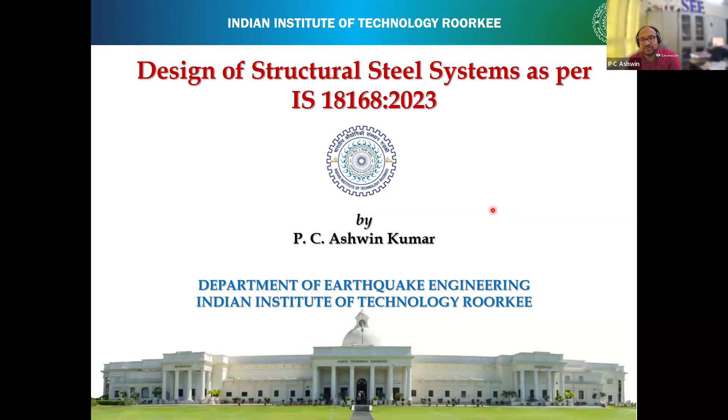Since it's a 1 hour lecture, I want to introduce the audience to the IS 18168 code, what it really does and how it goes about. I'll keep my pace such that you understand the basic concepts, so that when you open the code, you'll be able to understand what the clauses mean. I will not go clause by clause.

You know that IS 800 2007 is already there for design of steel structures, wherein we use the limit state method. In that, structural systems like MRF, CBF, and EBF are explained, more or less like tension member, compression member, and design of forces like column, design of beams, etc. But the structural system per se is given in section 12.

Section 12, if you open and see, if you have to design these systems, it's only about a 1.5 page detailed explanation—very limited. But recently IS 18168 in 2023 has come about, wherein these systems have been explained in detail.

Specifically, when you look at steel buildings, we rationalize it as good performing in high seismic regions. So accordingly, IS 18168 is specific for earthquake resistant design and detailing of steel buildings—it is a steel building code of practice.

So you have nomenclatures like MRF, SMRF, CBF, SCBF—which is nothing but moment resisting frame, and special moment resisting frame. Same kind of nomenclature as in RCC, where special moment resisting frame is because of the detailing practice, whereas nothing else changes in terms of the overall behavior of the structural member in seismic response. It is the detailing or connection practices that we have to follow, which makes them special.

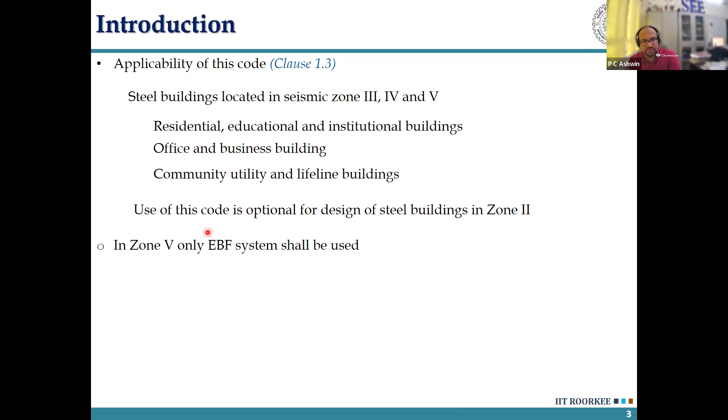Now, few things: in zone 5, only the EBF system, eccentrically braced frame system, shall be used. I want you to understand that there is something good about the EBF system, that is why it is being specified for zone 5.

The next point is, in zone 5, SCBF, special concentrically braced frame, shall not be used. So there is something wrong about the performance of special concentrically braced frame, that even after being special, it is not being permitted to be used in zone 5. So we'll see what those problems are.

And then in zone 5 and 4, SMRF buildings of less than 15 meters are allowed. You understand why that is, because of the stiffness issue - a moment resisting frame as such has less amount of stiffness. So above 15 meters, the stiffness becomes more of a problem. So it is like, okay, you go for less than 15 meters, in zone 5 and zone 4, you can use it.

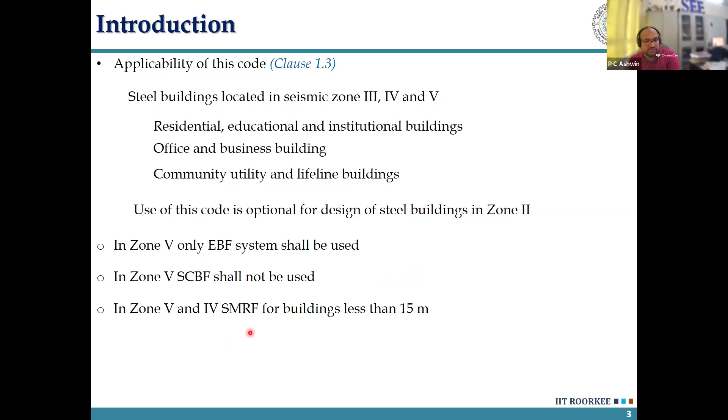That is what is given in IS 18168. It will be a little bit different from what is currently established in 1893 part 1 and part 5 of 2025. So we'll keep it to 18168 right now. And all steel frames in a building need not be designed for earthquake load - so this is a little bit new.

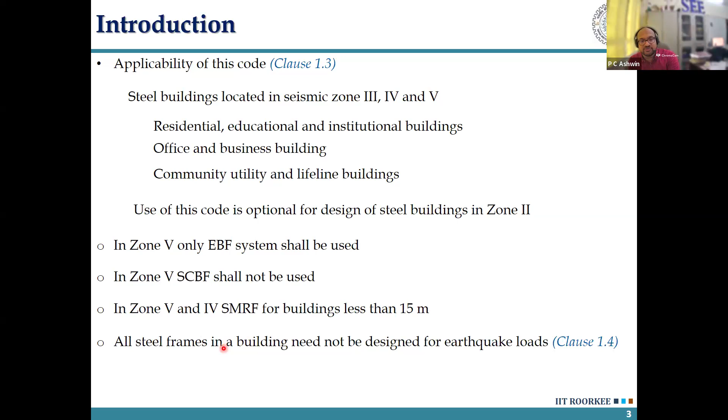We'll come back to it later on. It says not every frame or every element needs to be seismic force resistant. You can design a few to be seismic force resistant, and the rest can be gravity load resisting members. So we'll come to it later in that essence.

Now, at the concept level, you have to understand that this 18168 is not against or a new method with respect to design of steel structures. You were using IS 800 2007 limit state method, and now also you will use IS 800 2007 for designing the members.

This code, in terms of the capacity design concept, brings about how to assess the forces in the members. So the important aspect is how to assess the bending moment, shear force, or axial force in a member. And once you've assessed it correctly based on the capacity design approach, you go into designing of those members based on IS 800 2007 limit state method.

That's it. And you already know capacity design - all your teachers, once they talk about this capacity design, would have always shown this chain-like kind of structure, where they say that in capacity design, we design the weakest link to be the most ductile, and the rest of the members, these big ones, are designed for higher strengths, so that you don't depend upon ductility of the system.

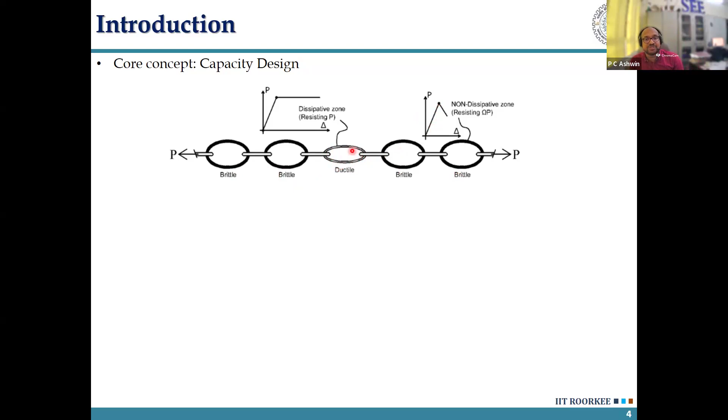That is why we call them brittle - it has high strength, high elasticity, etc., and the elastic strength, meaning yield strength, will be much higher than what this ductile member will be having. So the weakest member, designed for the adequate required force, is to be the most ductile, so that when I pull it, all the damage and energy dissipation happens in the weakest link. That is the capacity design approach.

Now, this would be the most important slide that you have to remember throughout this particular course that I'm going to take in this lecture. So now there is a force controlled element, and there is a deformation controlled element. The thing I'm saying is, suddenly I said deformation control and force control element.

The deformation control element is a designated element, in which we are not bothered about how much force is going to come, but we are bothered about how much amount of deformation it can take - which means I'm more dependent upon the ductility of that particular system, which means it is the energy dissipating element, that element is going to yield. It has to be ductile so that it is able to deform much more without failure. So the deformation controlled element is the most important element, symbolized by this ductile element in this capacity design method.

And the force controlled element is the one where we want the forces to be within the limits, such that it does not exceed this tipping point shown in this particular graph.

Please understand, deformation controlled elements are the ones we depend upon to dissipate energy through yielding or nonlinear activity during an earthquake, where deformation or ductility is more important. The brittle elements in the capacity chain, the stronger elements, are the ones where we depend more upon forces, meaning the maximum force that comes into them should stay below a certain limit.

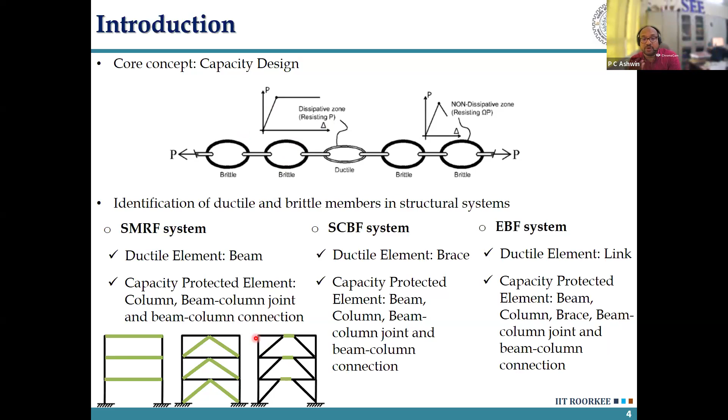So if this is clear, we will move forward. To summarize: deformation control elements are the heroes of the story, while force control elements are the more important ones for structural stability. We want those elements to survive so there isn't much damage.

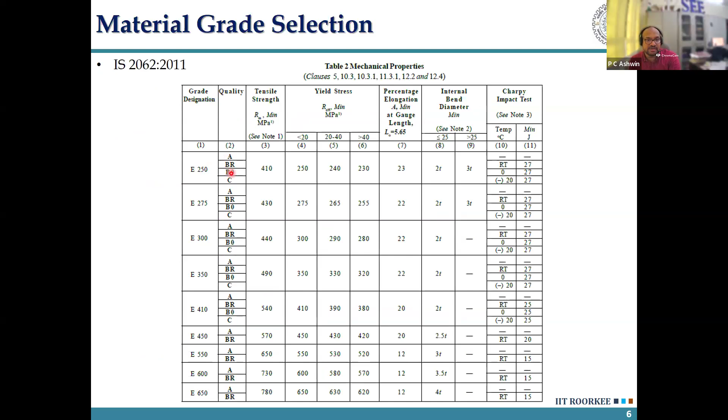As mentioned, there is a subcategory of steel grade, like E250 having grades B0 or C, meaning there are four subcategories: A, BR, B0, and C. Category A is for simple structures, like if you're building a temporary shed or non-important structures, you can go for category A steel, which is of low cost.

Normally in India we go for category B0 or BR. B0 is used when building a structure that is not temporary, where there is a possibility that the temperature may be nearer to sub-zero, like in Delhi, maybe around 3 degrees Celsius or so. For colder climates, you go for B0, where there is a minimum requirement of the Charpy test to be done at 0 degrees Celsius.

BR is where the impact test is done at room temperature, with respect to the ductile to brittle transition. A steel metal, when it gets colder, becomes more brittle. So if you are in an environment where the temperature is going to go down, you have to be very careful in terms of the selection of this subcategory of steel.

So if you are going into the Himalayas, and you want to build a steel structure, category C would be the most ideal, as it assures you a certain level of Charpy value at minus 20 degrees Celsius. It is mandatorily telling you to do the Charpy test. That is how you will be able to ensure it.

As you see, as the category goes down, the cost also increases because you're asking for more performance from the steel - give me higher energy at minus 20 degrees Celsius. That's the energy due to the impact test that you do under Charpy.

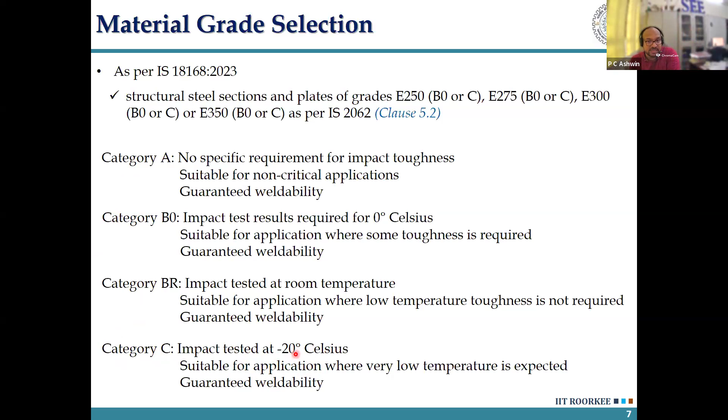Then you have the mill test report - I have kept the SAIL report here. A mill test report is something engineers, students, and everyone has to be very careful about. It gives detail about, when you buy steel from a vendor, what is the property of steel that you get. This is a mill test report from a particular lot.

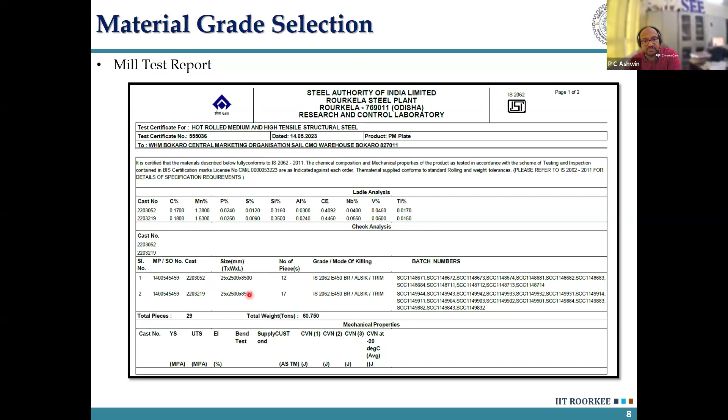They have given the chemical composition, the size of the plate, the thickness of the plate, and what is the yield strength that they have got from it. So this is the tested value, not the nominal value.

So if you're buying a grade of E450, they will test it. They will say in this lot, when I did the coupon test, I'm getting the value of the tensile yield strength to be this much. So this is the tested value.

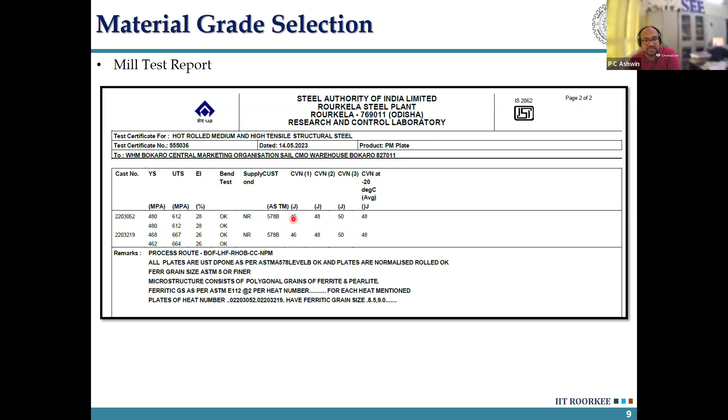If you buy from a local vendor, you might not know these values, and you might be under-designing, or the material may be underutilized or overutilized based on what the actual grade would be. But a mill test report gives a certificate as to what you're buying.

Now, if you look at IS 18168, one more thing it says is E350 grade is the maximum that you require, but you need certain properties - as I said, minimum percentage elongation is 22%. Now, 22% is a direct measurement of the ductility of the steel. You test...

...the steel under a monotonic test under a UTM machine, and you measure the percentage elongation over the gauge length. So minimum that would be 22%. Then it says the structural steel should have a minimum Charpy value of 27 joules at 0 degrees Celsius. And the ratio of ultimate to yield strength shall be 1.15. This is there in rebar also - the minimum 1.15 ratio is also mentioned there.

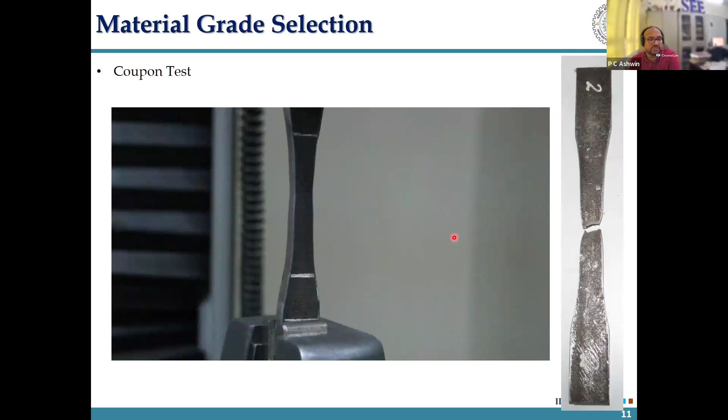So we'll get to know what these things are. So, coupon test - just for the audience, students who have not witnessed it - there is a coupon test. This is the gauge length. You have a grip in which it is being pulled, and it breaks in the gauge length area, meaning you have a valid coupon specimen over which you measure the percentage elongation, yield strength, and ultimate strength.

Now, FU by FY - understand this, I'll slow down. In terms of percentage elongation, that is a direct measurement of ductility. The relevance of the Charpy value - if you're already saying that 22% elongation is what measures ductility, why is there a need to do the Charpy test?

The Charpy test is important because when you do welding, or some kind of joining exercise, or even when the metal is formed during the manufacturing process, there is a possibility that there may be some initial voids or porosity, or while joining, some notches may be created.

So let's say there is an initial crack already present in the steel. Now, the Charpy test is like a fracture toughness measurement. It says if you have a crack, the opening or propagation of the crack becomes very fast if your Charpy value is less than a certain number. If it is more, even if you have a crack—see, if you weld any steel, the process is not completely flawless. It will have some flaws: porosity, slag inclusions, anything and everything can come in. So there is no point looking at a fracture initiation time; there is already some kind of crack there, and you want some kind of life in it. So when you look at bridges or buildings, Charpy keeps coming up again and again, which is a kind of fracture toughness in the material. So 27 joules at room temperature or 0 degrees Celsius is a guarantee that if you have a crack, it will not propagate quickly into a complete failure. That is the second thing.

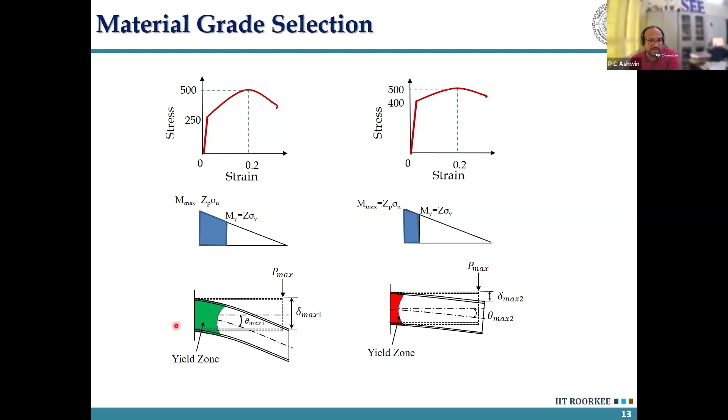If you remember section 12 of IS 800:2007, it says I want the peak strength in a beam-column joint or a moment resisting frame to be adequate enough up to 0.04 radians of rotation. So if I have a lower FU by FY ratio, I will reach the plastic hinge over a small length, and after that, there will be some kind of inelastic buckling or non-linearity or instability coming into the member, which I'll show later. So the crux is: if I have a higher FU by FY ratio, I have a larger plastic hinge forming in my member, resulting in larger rotational capacity.

Now, these are all the criteria needed for the member. Now you will say, sir, with respect to the members or buildings built earlier on, we have been using E250 or mild steel as the main grade of our structural systems. But understand that from 2012 there was an amendment to IS 800, wherein it was also mentioned that earlier—in IS 800:2007 before the 2012 amendment—bracing members shall be made of E250B, and special moment resisting frames shall be made with E250B. But this amendment says bracing members shall be made with E250B steel of IS 2062, or steel having Charpy V-notch energy greater than 27 joules. This means, in 2012 itself, our engineers were given a license to migrate to E350 grade also. That is the crux we have to understand: there was already a license given to engineers to go to E350.

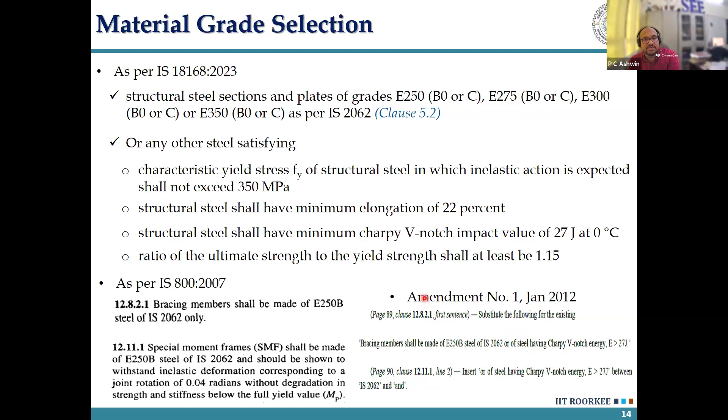With this particular code, it's closed forever that E350 is currently the maximum grade that you have to use. One more issue with the older IS 800 code was that it was ignoring the uncertainty factor, which has come in the new code.

When I buy steel from a manufacturer and say I need E350 grade, the manufacturer says the minimum expected, minimum nominal yield strength of the material will be 350 MPa. But when I test it in a coupon, you know the value will not be exactly 350 MPa. It will be 380, it can be 400, it can be 420.

Now the issue is the uncertainty - this is the mean value of the higher strength that you always get after testing. Let me call it the mean strength of the steel if I test it. So for E250, if I buy a steel of E250 grade, the mean value of the strength I'm always going to get is 250 into 1.4 times. That would be the yield strength of the steel I'm going to get. As the strength of the grade increases, the uncertainty factor decreases.

Now you will ask me, sir, what is the issue? The uncertainty factor - if Tata is selling E250 grade and you're getting higher strength, what is the issue? I'm helping you out, your member can carry higher load itself. The issue is, if you think about it, the example I can give you is strong column, weak beam.

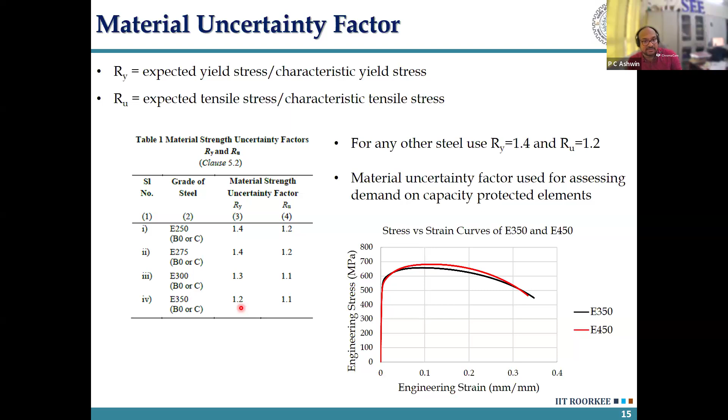So in seismic design, this uncertainty factor becomes very important, which means the next question that might pop in your head is, were we doing our strong column weak beam design incorrectly earlier on? The answer would easily be yes. You are risking it - we don't know what the uncertainty factor in the actual yield strength is. But as per this code, you will soon see how it caters for that uncertainty factor in the strong column weak beam ratio.

Now, past earthquake performance - in 1906 in the US, the San Francisco earthquake came in, and whatever structures you see standing were mostly steel structures. There, steel was less costly. In India, coking coal, which is used, is imported, and many other factors result in higher steel cost. That is why people go for RCC. But in the US, after the 1906 earthquake, people started building steel structures majorly because at the end of the day, the seismic performance or ductility of steel is much more than RCC structures. Cost is the factor that is deciding everything in our country.

So we are currently going into RCC and then structural steel in terms of rebar is being used. Rebar is the one which is giving ductility to the RCC member, etc. That is coming into picture.

Now, in earlier years they were like, okay, we are building with steel, it is working wonderfully, it is like a very good kind of structural steel for earthquake performance, etc. In the 1994 earthquake, it was observed that there were failures that were seen in the steel structures.

You can see the crack. You can see this is the beam bottom flange. There is an opening here, which is the weld access hole that is given to weld the bottom flange here. There is a weld backing bar given here. This is the column flange. This is the continuity plate, and this is the stiffener that is given there.

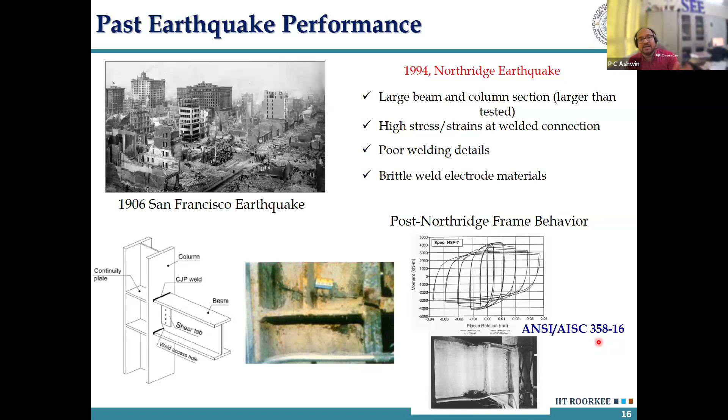Again, one more thing - use those methods, but please understand the uncertainty and other issues with Indian material. So don't follow it blindly. That is my point. But for them, they have their material, they have tested it, and they have come up with AISC 358 that we all use.

Few of these connections you can see - this is a beam column joint. This is a cover flange plate on top, there is a bottom flange plate. It is welded - it's a moment connection, and it's a bolted web connection that you have there.

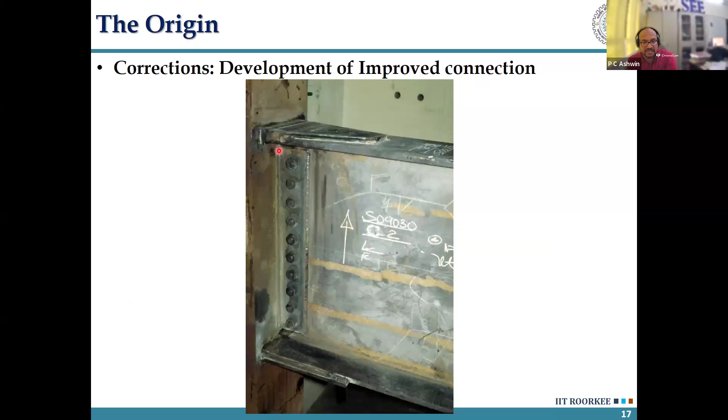And when you test it under seismic condition, you get this kind of failure. Now it's not a failure in the sense that it has taken up to the failure load, but you can see a good thing - if you haven't seen plastic hinges in steel structure, this is what a plastic hinge looks like.

So during a test, what we do is whitewash - we put white paint over it - and you know that when a material yields, it has a permanent deformation set into it. Once the material crosses the yield limit, it has a permanent set that comes in. So wherever the white paint has gone off is where a permanent set has already come into the structure.

And into the member. Now what you see here at the top, the flanges - this is a phenomenon known as local buckling. Local buckling is inevitable because when you have an earthquake, this beam is going up and down. There is a permanent deformation that comes into these flange members, and when you have these elongated flange members going under compression, inevitable local buckling is bound to happen.

So the natural thing to do is ask how can I delay this local buckling in a member. Whenever local buckling happens, you can see in the hysteresis curve or load deformation curve that whenever instability occurs, the energy dissipation capacity drops drastically. So as an engineer, your rule was strong column, weak beam - plastic hinges should form in the beams itself. That is forming, but this local buckling is creating a problem because it's an instability. So how do I delay it?

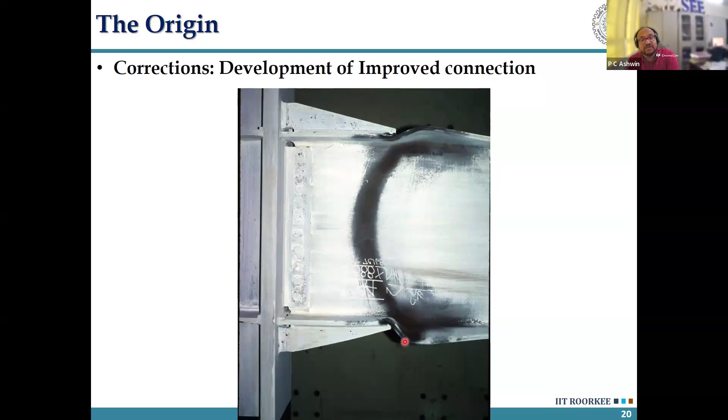That is what we do with compactness criteria, or the B by T or D by T criteria that we use. So if I look at another connection, let's say I put a stiffener plate on top - what happens then? I've shifted the plastic hinge formation to a further point, but again you can see the plastic hinge formation here - the member has yielded all throughout the depth of the section, and yet again you see the local buckling. So local buckling is natural to come in there.

This is a reduced beam section. This is also being followed and given in AISC 358 on how to go about it. Rather, when you don't have this reduced beam section, there is a chance that if you don't use these flange plates or stiffener plates etc., you can have the hinge formation nearer to the column face where your connections are.

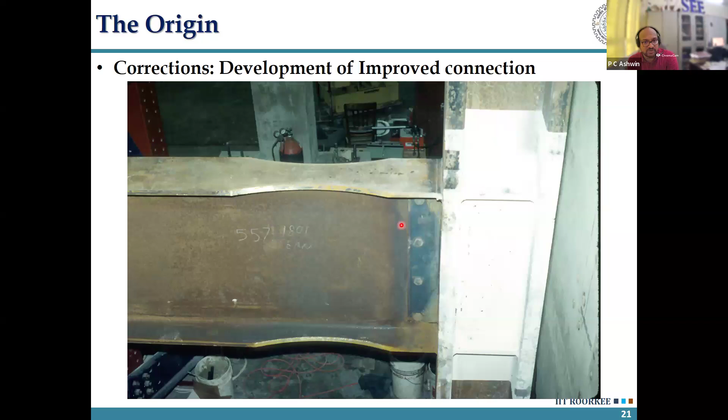So unduly stressing the connections is not a good thing. Reduced beam section is used to concentrate this damage in these reduced regions. So you're bringing up a location which is weak, where you are pushing the plastic hinge to be formed. That is the logic here.

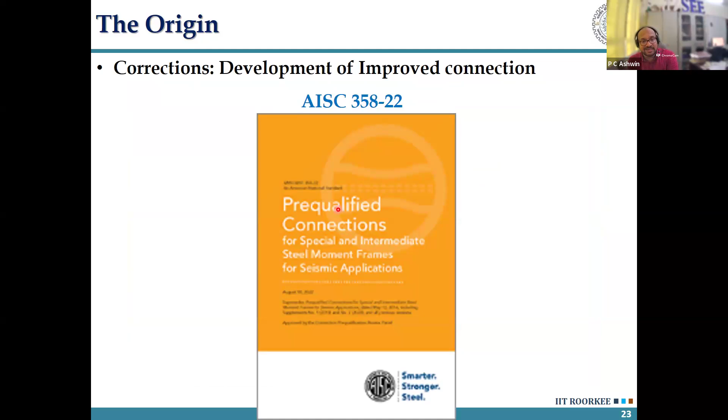AISC 358 has around 12 connections given with respect to design, etc., where you can look this up. But please remember, it's your material, Indian steel—if you are using it, you have to look at what are the pros and cons of that particular steel. And as I said...

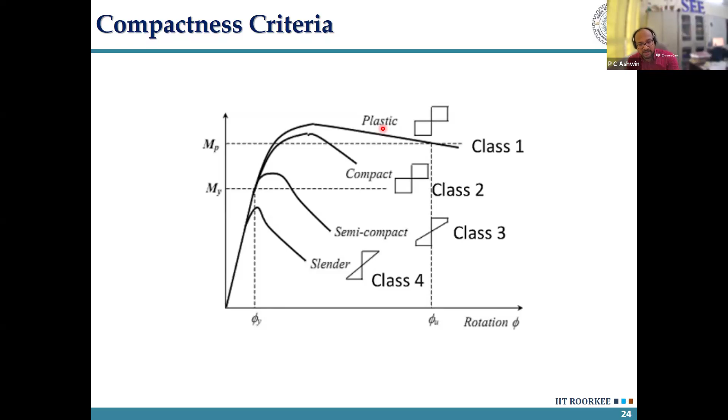Compactness criteria given in our Indian code with respect to plastic section, compact section, semi-compact and slender—when you see plastic section, you might say it is very stringent. The B by T and H by T criteria is so stringent that I'm made to use a thicker section in the flange and web. But please understand that this is put forward just for the reason that the local buckling is not eradicated completely, but it's actually delayed. That is what this B by T ratio is bringing about with respect to these compactness criteria. So you have to follow them strictly such that you can avoid large deformation due to local buckling in the member.

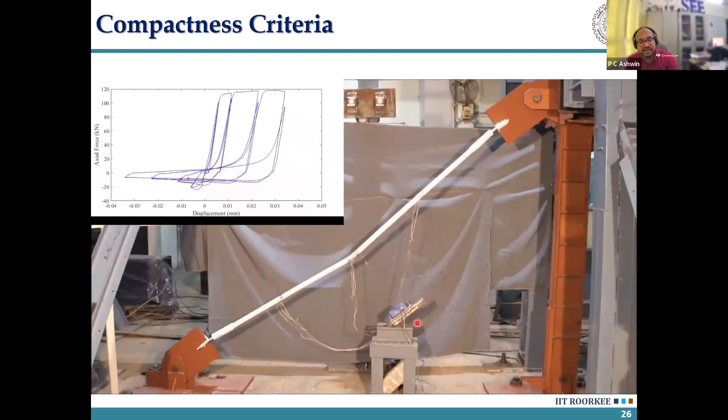If you look at a brace, this is the buckling of the brace in compression, and then you have yielding in tension. As we said, the green member in the CBF is the brace. A brace also undergoes global buckling, and it also undergoes local buckling—this is local buckling. If you look at the global geometry, yes, this is the global buckling that you see.

But when you look at the local geometry, there is crimping or folding of the plates at the location where the members are bent the most. And wherever that happens, you can see fracture initiation start. So global buckling combined with local buckling initiates the process of fracture initiation in a member, and once it initiates, there is suddenly a complete fracture of the brace member.

So whether it be circular section, hollow square section, or hollow rectangular section, local buckling is present—this is again local buckling. And you can understand in a square section or a rectangular section, the most stressed region will be the corners, and that is where the fracture initiation will start, and finally it will result in fracture.

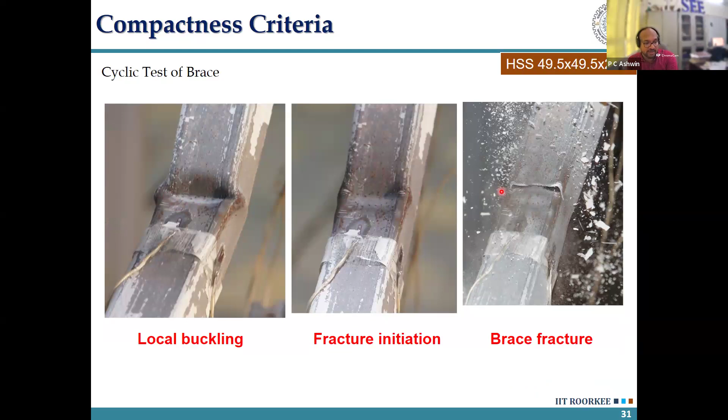Now, I would advise all the engineers attending here to go to AISC 341-16, or 341-22, wherein, in our current code IS 18168, the code committee has put a stringent line that all members should be plastic, right? But if you look at the international code, it says whichever is the green element—again referring to that diagram—whichever is green should be the most ductile, and whichever is black can be a moderately ductile member.

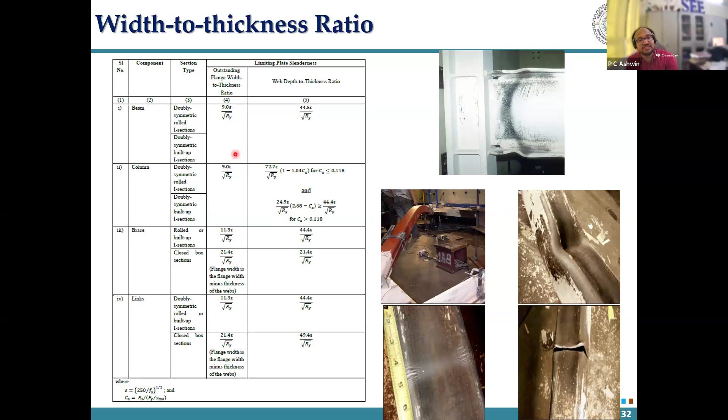So the equivalent table in AISC 341 has one more row which says what is the B by T ratio for a highly ductile member, and what should be the B by T ratio for a moderately ductile member. So if you read the code closely and understand the procedure—currently we are worrying that maybe engineers won't understand, so it's always safer to go for all sections to be plastic. It is okay if you understand the theory well; you have nuances or conditions in the code itself that you can change your design accordingly.

So how do you go about thinking where to give the plastic section? You understand that plastic section is the better section in comparison to compact, semi-compact and slender, because it can achieve its plastic hinge capacity and have adequate rotation, which is what you require in a steel member in a high seismic region. So whether it be MRF, CBF, or EBF systems, the first thing you have to understand is what is the ideal behavior.

Where are the plastic hinges to be formed? Where do you not want it to be formed or concentrated? As an example, in the MRF system, you can see the beam ends is where you would expect the plastic hinge to be formed, and at the base of the column. The concept of strong column weak beam was not made in the sense that we are always taught that if a column fails, the whole building collapses, but if a beam fails, it's a localized failure. That is not why strong column weak beam actually came about.

The main idea is if you have hinges forming in the beams of a structure, you have more energy locations where your energy dissipation can happen. But if it forms only in the columns, it can result in a soft story failure, with lesser energy being dissipated, leading to complete collapse, in comparison to all the beam ends forming plastic hinges because of the strong column weak beam criteria, resulting in higher energy dissipation. That is the whole deal of this.

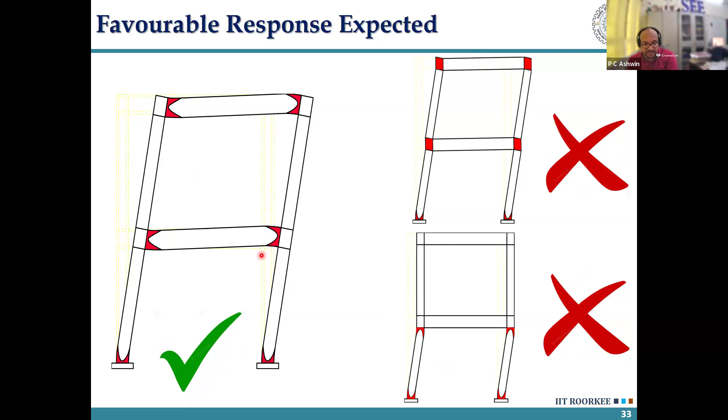So if you have a structural system, whether it's moment resisting frame, EBF, or CBF, you have to first understand what the ideal behavior is. Then you will come along to the code.

I'm jumping a few lines here. If you open IS 18168, it's confusing because there's a load combination given which says, along with the load combination in 1893-800, an additional load combination to be considered is 1.2 dead load plus a factor of live load plus 1 times ELM, where ELM is omega times EL, earthquake load, and omega is the overstrength factor.

Now, with a pen and paper, we can't talk more on the codal clauses, but understand that this particular clause using the overstrength is not for the design of the green members, but for the black members, or the force controlled elements. You design the green elements for the basic combos already in your code. Once you've got the member sizes for the green elements, you use this combo to make the columns, or black elements, or force controlled elements, stronger than the green or deformation controlled elements. That is why this is used.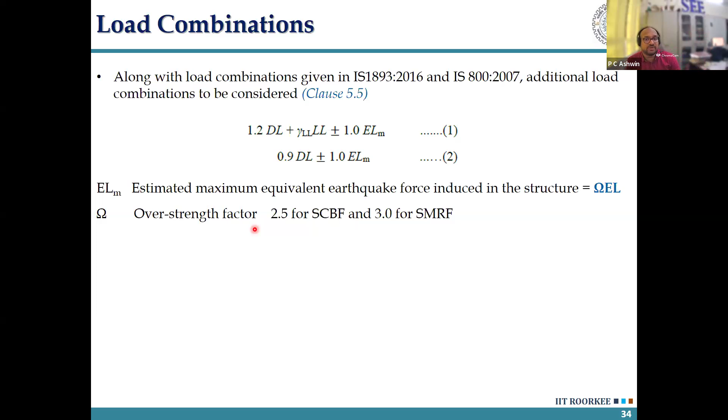So please understand this codal load combination comes under the global analysis -- I'll explain it for the CBF element later on -- that this is for the force controlled element only, and should not be used for the design of the green element. For those who came late: green is the element designated for energy dissipation, inelastic energy dissipation, and black is the element we want to mostly remain elastic during an earthquake.

We haven't gotten into the structural system so far, but it's very important to remember SP6. There is one more code that came in 2004 which many don't realize -- IS 18168 -- making it a mandatory requirement that only doubly symmetric parallel flange standard roll sections, or built-up sections satisfying the compactness criteria of table 2 of 18168, should be used.

So understand that in SP6 we had sections like ISMB 600, ISMB 400, which had a tapered flange, not a uniform thickness in the flanges. So the issue is if you tighten them with a bolt, you get non-uniform thickness in the members. In seismic behavior, this has a higher potential to fail early because of that non-uniform thickness, and the bolt has to be tilted to actually grip it.

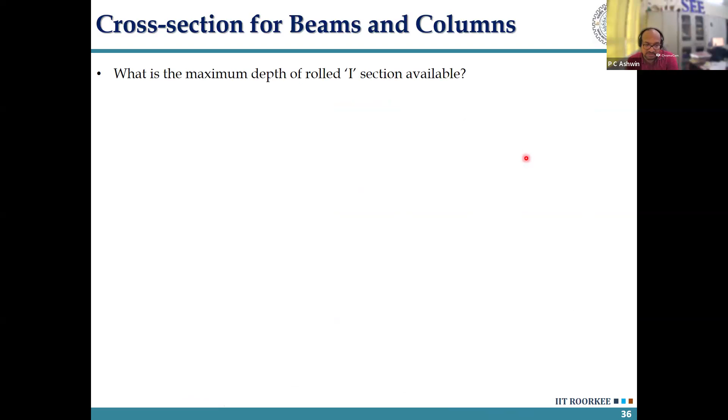So the code now mandates that if you are in a high seismic region 3, 4, or 5, and bound to make a structural system like SMRF, SCBF, or EBF, you have to use parallel flange sections. These two have now been combined into IS 808, the latest revision, which has both tapered as well as parallel sections in one code. But this code existed from 2004 itself; many didn't know about it. So if I ask what is the maximum depth of roll section available as per SP6, the number was 600 mm, but as per this 12778 that you see, it's up to 900 mm.

If I look at the criteria with respect to B by T, or plastic section, the number of sections available is higher in the parallel flange section (12778), and the number of sections that pass the plastic section criteria is also higher. So you have a larger pool of sections available in the parallel flange section community, and you can use them in your high seismic regions.

It's almost mandated now: don't use tapered flange sections anymore in your seismic buildings, etc. You can go for built-up sections instead, which anyway have parallel flanges.

Now, this is something manufacturers and the design team should note: this is the section modulus ratio of all the Indian sections, and this is for the American sections, the W36 and all the W category of sections. You can see that from a depth of 350 to 500 mm, they have a larger inventory of sections with that particular depth.

How is this achieved? If you have a 500 mm depth, how do you get a larger section modulus? It's through increased thickness of the flange and the web. So if you are a manufacturer, if you can give larger thickness rolled I-sections, etc., that's the advantage.

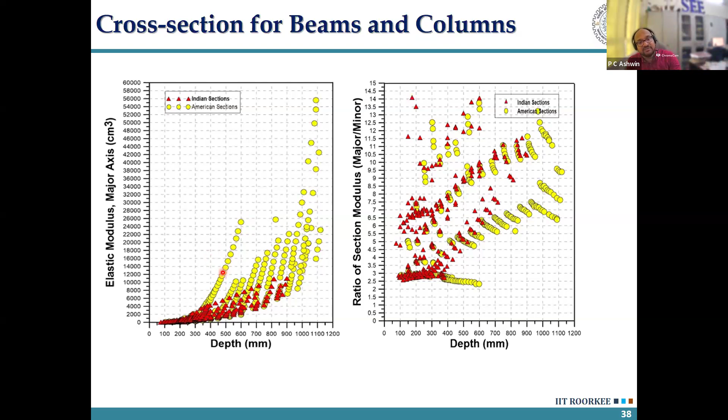As an architect or designer, if the architect makes a box of 400 mm by 400 mm, I would have in my inventory the section sizes that allow me to put a particular member for that size. So the advantage is the architect will never worry that 'sir, this isn't passing at 600, I need a 1 meter depth column or beam to pass the requirement.' That's the advantage they have, and we should also be moving in that direction.

So now coming directly to moment resisting frame. The first steel moment resisting frame was the Chicago building, the Home Insurance Building, in 1884.

At that time, the connection between beam and column was very rigid, with a lot of connection members, etc. The Empire State building started using rolled I-sections, though these were mostly built-up sections back then.

Post World War, they realized they needed to optimize the connection design, etc., and came up with the kind of connection we see today. A lot of testing happened in the 1960s and 70s, checking the connection behavior, etc.

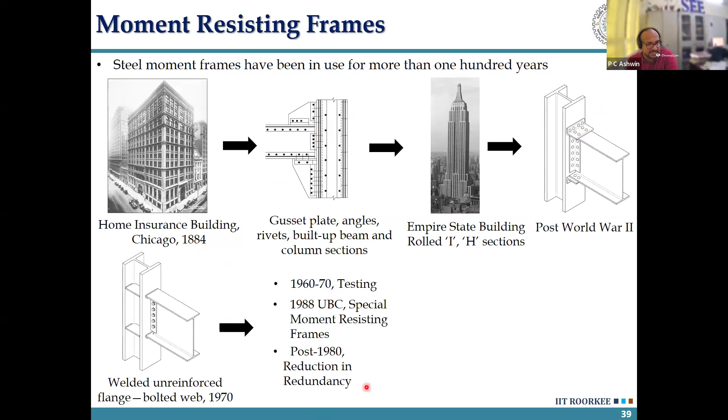But the mistake they made is that they tested only smaller sections, not the large sections actually used in buildings. This is also one of the reasons for detailing criteria and welding quality issues, the Charpy value of the weld. When I say 27 joules in terms of base metal, if you look at IS 18168, the requirement for minimum Charpy for the weld is also now given.

It's a higher value, 48 joules or something like that, because you are not depending upon the ductility or percentage elongation in a weld. Weld is meant to be the strongest member.

If I look at a moment resisting frame and ask which is the strongest element you want, you would always say connections, then columns, then panel zone, then beam. Whereas ductility-wise, you go in reverse order: the beam should have the highest ductility, panel zone next, then the column, and you want the least ductility in the connection, since you always want your weld or connection to be the strongest.

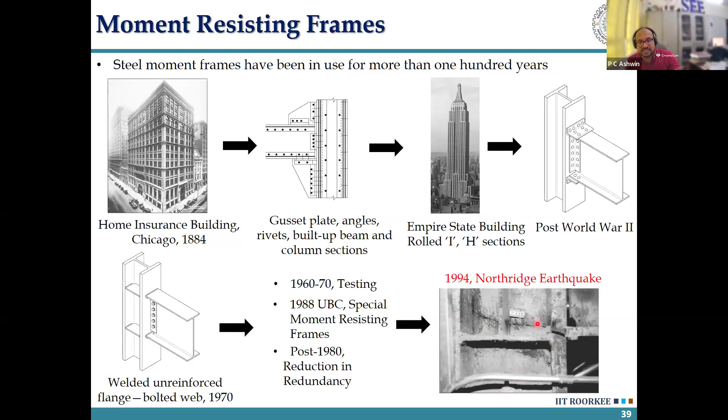So in that sense, the higher Charpy energy requirement is given for the minimum energy in welded connections. Since they did not test the larger sections, they ran into failures, which resulted in standards like AISC 358, etc.

In a moment resisting frame, the ideal behavior is for plastic hinges to form at the ends of the beams and at the bottom of the columns. Inelastic behavior is accompanied by local buckling of the beam and column flanges and large deformation in webs. The idea is to limit the deformation from this instability, not letting it proliferate, through the use of compactness criteria. That is the purpose of the compactness criteria.

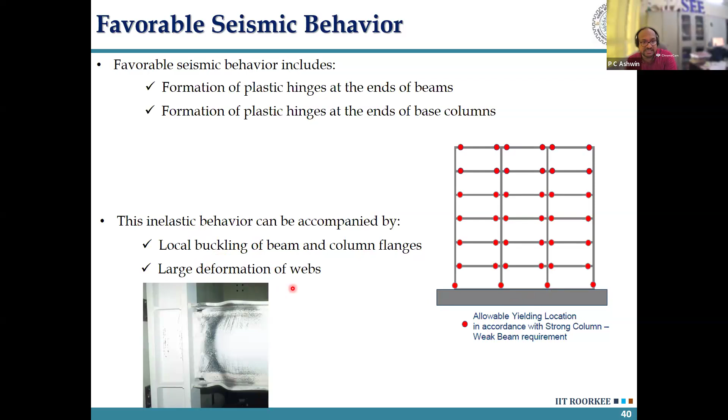In a moment resisting frame, even if you do limit state method, when you look at all the combinations and start your design, strength criteria is easily achieved. But the thing that pushes up your section sizes is mainly the drift criteria, because a moment resisting frame does not have much stiffness, since it only has vertical and horizontal members.

There is no diagonal member increasing stiffness like in braces. Then there is P-delta instability, you have to take care of the P-delta ratio. Then strong column weak beam criteria you have to satisfy. Earlier in IS 800 it was 1.2, now it's 1.4 in the new code. We'll come to that soon.

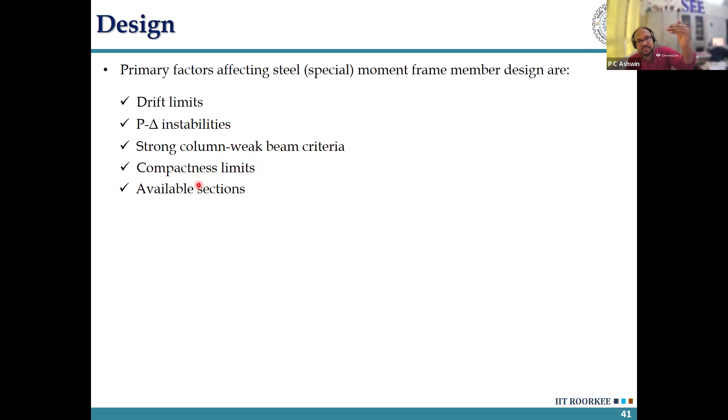If you have sorted that also, then the compactness criteria comes in, so that you have a highly ductile member. The code says make beams as well as columns a plastic member, nothing other than plastic member. As a designer, if you know the code, you can go for a lower size, but these are the things that bump up whatever you need as the requirement. When you finally come up with the required section modulus or cross sectional area, you check the list of sections and suddenly you don't find the appropriate cross section. These are the things that bump up the final cross section that you apply in your system. But ductile behavior in a high seismic region is needed.

So compactness criteria is required. The frame should be laterally braced for stability. Even the region where plastic hinges get formed needs that location to be braced so that it does not undergo any lateral movement. Then there's the strong column weak beam philosophy, which we already talked about.

Then there's the designated protected zone. What is a protected zone? It's where the plastic hinge forms, where you've seen that paint getting removed. At that location where the plastic hinge is expected to form is called the protected zone, and that zone has to be protected at all times so that nobody welds any secondary member or pokes a hole into it, or anything comes into that location. It is sacrosanct that that particular location where the plastic hinge is to be formed is to be protected at all cost.

Whatever weld comes in that plastic hinge region, since the weld will be highly stressed at that location due to plastic hinge formation, that particular weld is called a demand critical weld. There you have to take care about the minimum Charpy value, and the welding has to be done properly. That is the demand critical weld we are talking about.

And then the panel zone, which is what comes up next. I'll quickly cover that also. There's confusion about whether the panel zone, the junction between beam and column, should yield or not. The answer is it should have limited yielding, because if there is no yielding in the panel zone, the onus of energy dissipation falls entirely on the beam.

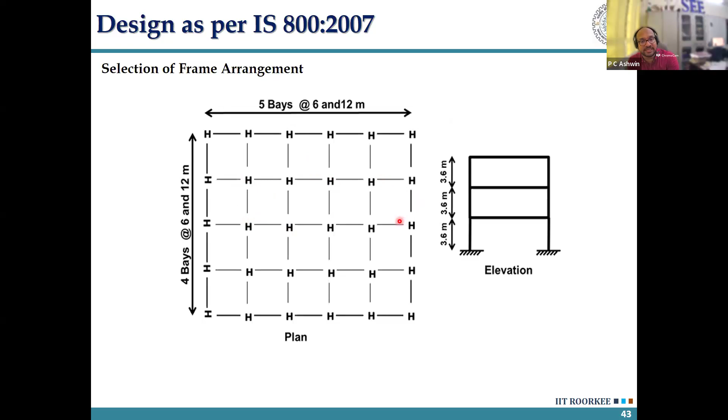Not all frames need to be moment connections. In the US, the peripheral frame is what has the moment connections—you have a moment resisting frame on the periphery, sometimes with the corner column being a box column or a cruciform, and the rest of the internal frames are all gravity, designed for gravity but for deformation compatibility. So when the earthquake comes, due to higher stiffness of the peripheral members, the forces will flow there. Some amount will come inside, but due to the seismic forces this will deform a bit, and due to the rigid frame, the gravity columns will also move alongside with it. You have to cater for that deformation compatibility a lot; otherwise you're designing for the gravity forces only.

If I support it at the middle only, with some magic wand, without controlling the top and bottom, I will get heavy rotation—I'm not able to support the lateral torsional buckling that I was seeing. But if I somehow connect the top and bottom flange, then I'm able to restrain the rotation in the beam due to that particular force. So there will be no lateral torsional buckling if I support the top and bottom flange. Accordingly, you understand why lateral torsional buckling happens.

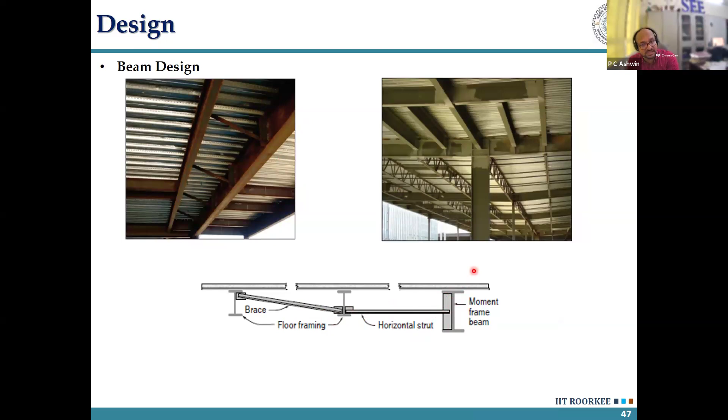In a seismic case, there is a possibility that reversal of stresses can also happen, so in that case you have to hold top and bottom. If you read the current code, IS 18168 says when to hold the top flange and when to hold both the top and bottom flange. Like this image, this is the main beam, and you are holding the top flange and bottom flange by this, and from the secondary beam you have an additional attachment with this connection. So lateral bracing of the beams and columns is necessary to achieve the maximum ductility in the member.

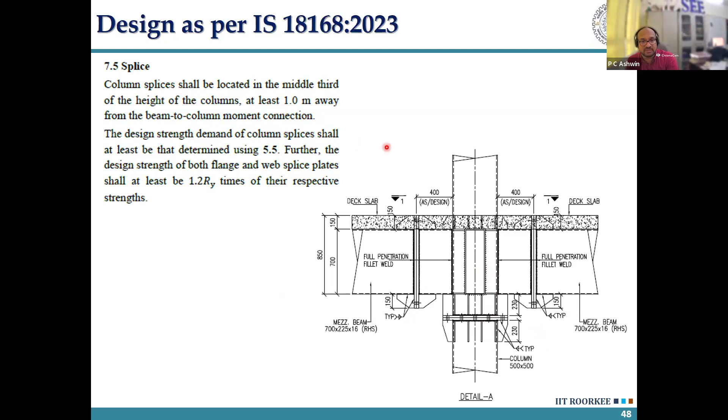Now, splice of the section. Earlier there was no mention of where to give the splice. We normally had the notion that it is better to give it in the middle, but the architect would make us run around saying that at the middle of the column it is not looking good—shift it somewhere. So you would say no, at the joint it should not be provided. Currently, the code gives a location that it should be preferably at the middle third, but at least 1 meter away from the beam column moment connection.

Now, this is more or less the strong column weak beam ratio.

The earlier one, if you see MPC by MPB greater than 1.2, that was there. Currently the equation looks very complicated, but if you look closely, let's start with the beam. If I'm looking at strong column weak beam ratio, I need to be very sure, I need the beam to be the strongest and the column to be the weakest, and then ensure that the ratio is greater than 1.4, which will ensure that the column is finally strong.

So if you look at the denominator, you can see fy into Zp, that is the plastic moment capacity of the beam. This equation is simple. Ry is the uncertainty factor, so it says the material has the capacity, or the beam can have a higher capacity than the nominal plastic moment capacity of the section. This Ry is the uncertainty factor, and 1.1 is the strain hardening ratio.

So now you understand that whatever can increase in the beam, I have now included in my equation. It's not looking simply as MPB. But when you look at the column, I have again the plastic moment capacity of the column, but this 1 minus Pu by Pd takes care of the reduction in the moment capacity of the column due to axial force coming into it. So now you understand what I initially said, that I am taking whatever maximum load can come in a beam, and I am taking whatever reduction in moment capacity can happen in a column. Then I am making that ratio greater than 1.4 MPC by MBO.

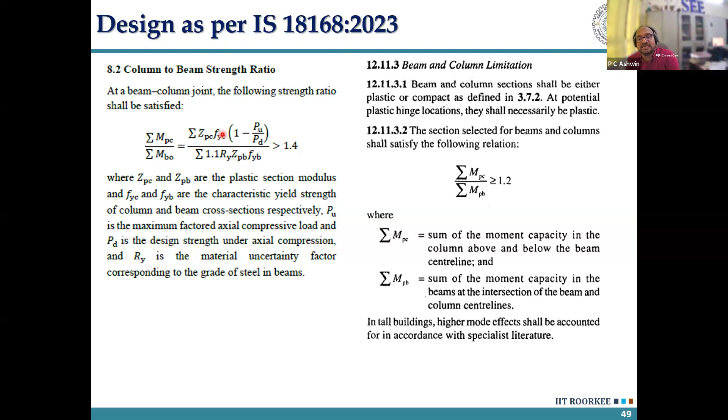In that sense, finally, when I've taken up all uncertainties, all the capacities that can come, I am very much sure that whatever image you've seen earlier with respect to yielding of the beam, etc., I'll achieve it. That is the beauty of the new code, that it assures everything.

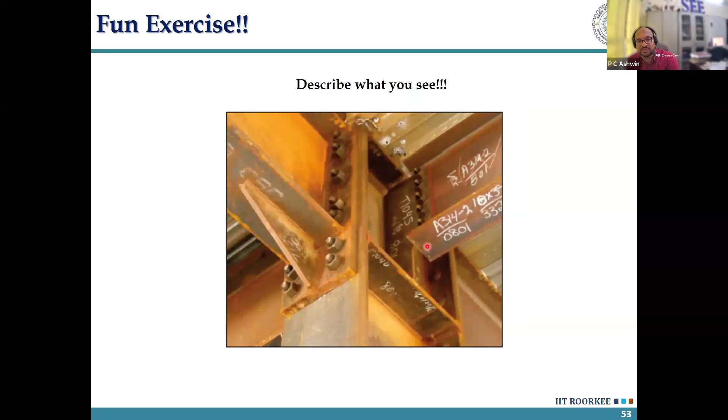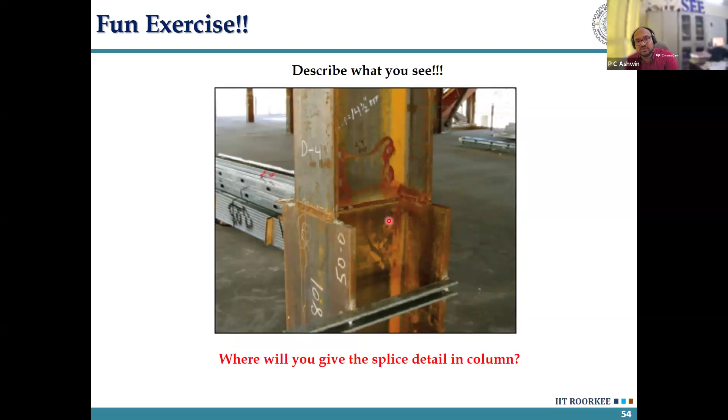This is a moment connection here, or even more in terms of making you understand. Moment connection, this is a simple shear connection. If we had time, we would have discussed this. This is the CJP welding, so this is where the splice connection is being given. CJP is complete joint penetration weld, a butt weld that is given by chamfering the plate, etc., so that you get a rigid joint from there. So that is all about this particular aspect.

Moving on to concentrically braced frame, it is a different concept. In your house, the same concept, I'll explain it. In your house you have electrical appliances, and there is a fuse. When there is a voltage increase, the fuse blows off, and your main electrical appliances get saved.

So you have an asymmetry in the energy dissipation. You don't have a symmetry kind of behavior. If you remember, the hysteresis curve in a beam column joint in steel is a symmetrical hysteresis curve, but here you have an asymmetry.

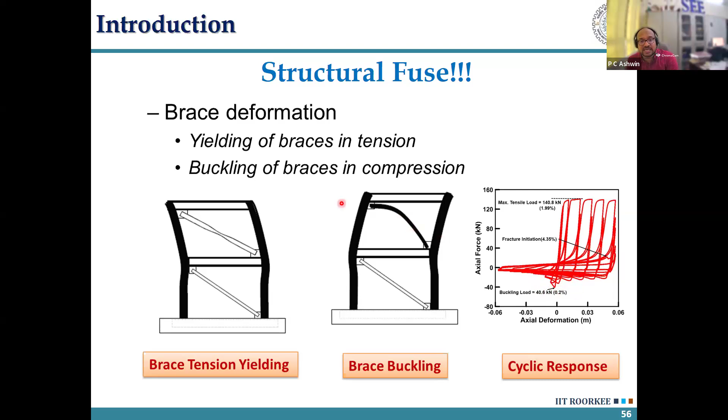So based on this particular element, I have to design my beams and columns, or the force controlled elements that will come to it, right? So this I've ensured, what is required in a brace frame system.

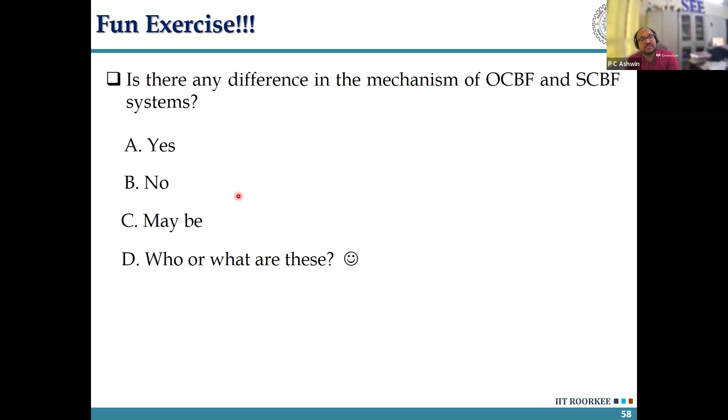Is there anything different between ordinary concentrically braced frame and special concentric brace frame? No, the concept is the same, the energy dissipation is the same, but the detailing is different, since SCBF is given in high seismic regions, it will have higher deformation requirement. The detailing has to be done properly. That is the difference coming in OCBF and SCBF.

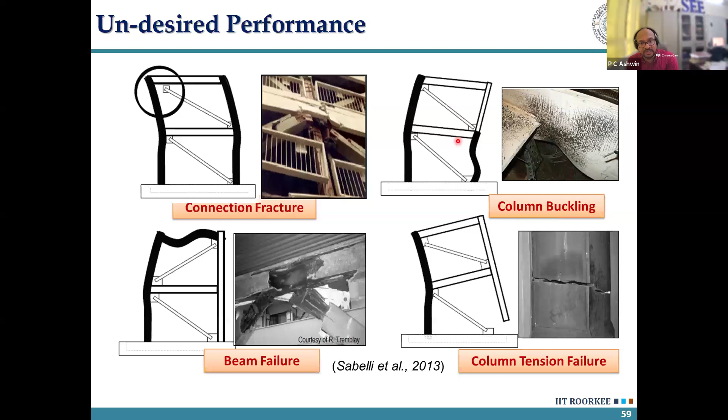So undesired performance is connection failure, column buckling. The force controlled elements like column buckling and all should not happen. The beam failure should not happen, and the column tension - since you give braces in a single bay, there is a higher concentration of tension and compression forces in the column. So there is a possibility that either the column can buckle or the tension in the column can cause failure in the connection. So these should not happen.

What is desired, if you look, brace buckling is desired, brace tension yielding is desired, column flexure is desired, and beam flexure is desired, right?

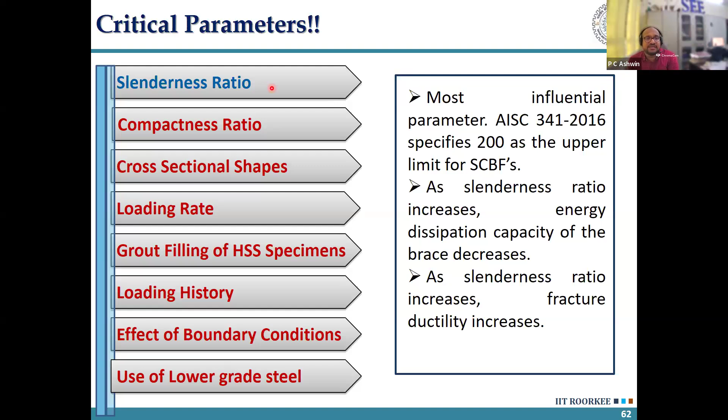Now, the important criteria, if you're a designer deciding what is important for a brace frame, the slenderness ratio is one big deal, in terms of which there is a limit given in code with respect to slenderness, that it should not exceed 162 or 165. The meaning is, if I go more than 165, it is more like a rope. It will have yielding in tension, which is good, but in compression it does not give me anything. The asymmetricity in the hysteresis is very high. So better have some limit on this. So the code says, keep it below 165.

Then compactness ratio, as I said and shown with images earlier, if my compactness ratio is good, the fracture initiation is delayed in the member, which means my brace will survive. Now, the hero in my story in CBF are the braces. The more they survive, the more they will dissipate energy.

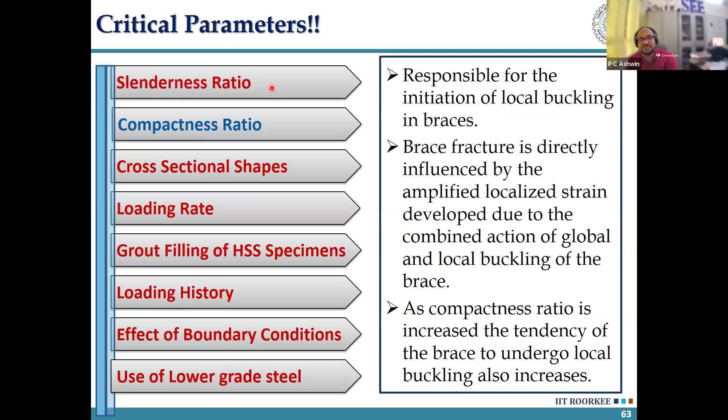And cross-sectional shape - you have seen that in the hollow rectangular and square shapes, the corners fracture early because of stress concentration. So you might have seen industrial buildings or metro stations with hollow, square and rectangular members. That is okay as long as it is resisting wind. If wind is your governing design, hollow rectangular and square is fine. But if seismic is governing your case and you are designing a CBF or SCBF, hollow circular is a better choice than hollow rectangular or square.

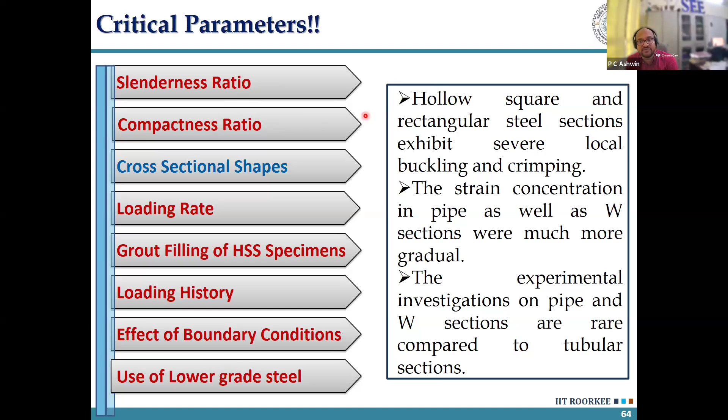That is the issue why they have not put it there. But as I said, if you have the knowledge and the capability, go for a circular section.

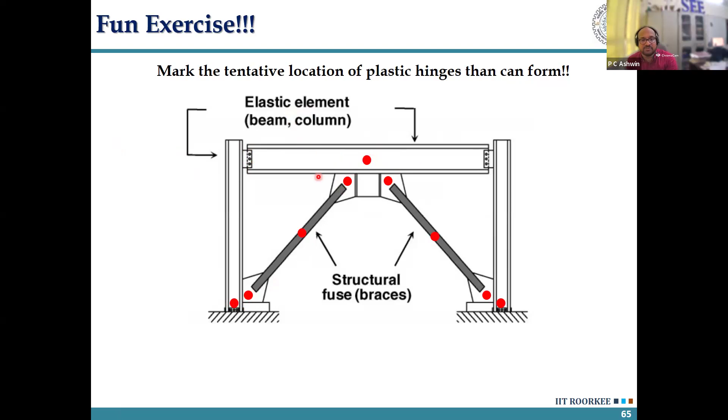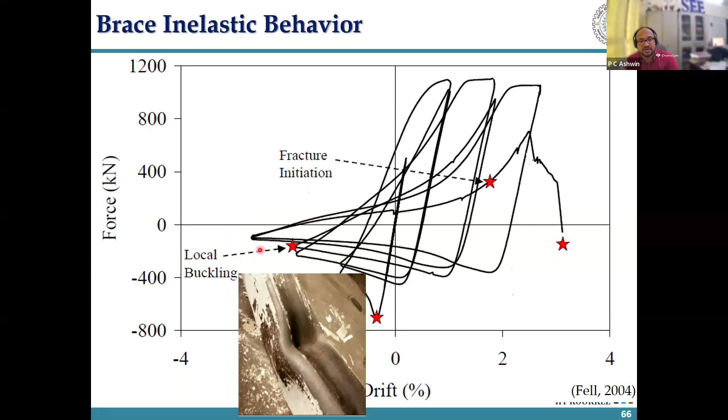Then, as I said, global buckling happens very initially, at 0.3% drift or a very small amount of axial deformation. Then it takes some cycles. If your compactness ratio is very low, meaning it's a very sturdy, stout section, your local buckling happens much later, which is what we want. So after a number of cycles, local buckling happens. And once local buckling happens, you can see in the very next cycle itself the fracture initiation starts. And as soon as fracture initiation starts, it fails.

So these are all the issues why the current codal committee, due to the asymmetric behavior of the braces — in a certain floor, if the brace yields or buckles, the stiffness suddenly decreases and there is a tendency for a soft story to form — that is the reason the code has removed it from zone 5. It is not a better performing structural system than MRF or EBF. You should avoid it.

So this we have already answered: the I section is better, then hollow circular, and then go for a square section.

So now I want to take you through the procedure. This procedure, conceptually, you can also use for EBF systems. So if I have a building, a steel structural system — let's say in your mind you think of a rectangular structural system — the first thing would be, where would you want to place your braces? The easiest choice would be wherever you were placing your shear walls, let's say at the lift core or staircase wall, you can provide your braces there.

The easier approach would be, since I need some torsional rigidity, I'll place it more towards the farther end of the building, the outer end. So the external outer frames is where I would normally provide my braces, let's say.

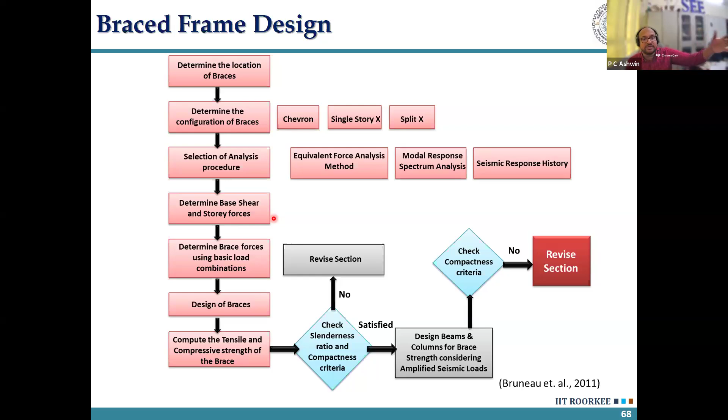Now the next step is to design the beams and columns in the brace frame system. So what will you design for? Capacity design says whatever maximum force your brace can give to your force control element, design for that, the maximum worst case. My demand was only 1000 in the brace. After designing, due to higher section and everything, the capacity of the section is 1200. So whatever that 1200 section is going to give is what I will apply to my beam and column element, that is a force control element.

So there are two types of analysis. One is the global analysis, which is what the earlier clause showed you. Your braces are there, the frame is there, your lateral forces are applied as a distributed lateral force. You use this combo, you use the overstrength for SCBF which is 2.5. So let's say you designed your brace for a combo of 1.5 dead load plus 1.5 earthquake load. Now I'm using a factor of 2.5 to design my beams and columns, which means I'm making it stronger than the braces. That is what I call the global analysis.

The next is I have to check the local analysis also. There's a local analysis in CBF. It's a bit complicated because earlier this was not there, in the previous version of the American code it was not there. What it covers here is that there will be an instance in the life of the CBF system where your tension will be maximum and your compression will be maximum initially, when the loads are in a certain state.

But once the brace buckles, there is only a limited amount of strength that remains in compression. Once it buckles, there is only a steady value of compression that it can have. It gradually reduces, but the code has limited it to a value of 0.3 Cmax. This is Tmax, the maximum tension that can come in the brace, Fy into Ag, yield strength times gross cross-section area. But don't forget the uncertainty factor, you used an E250 or 350 grade brace, the actual yield strength might be 300 MPa. So that's what this tension capacity gives you.

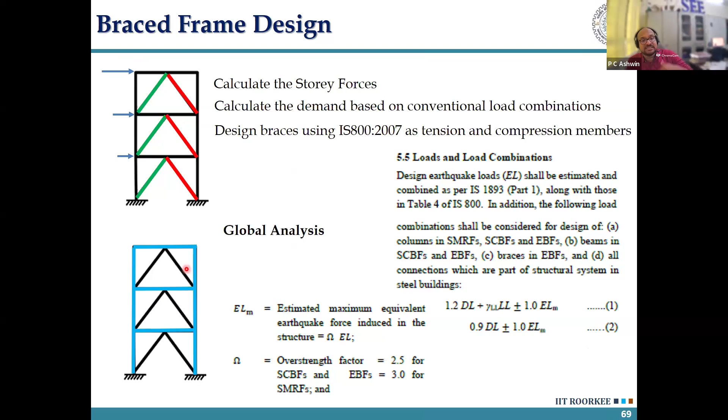That is the concept. So when you do this local analysis, there are no braces, you're aiming directly for the beams and column design. So for these combinations, you design for whatever worst case that can come in this scenario.

Why this came about, you may ask - it's quite complicated, why make it? It's because after the Kobe earthquake and Northridge earthquake, they found that wherever the chevron configuration was used, they were designing as per this global analysis only.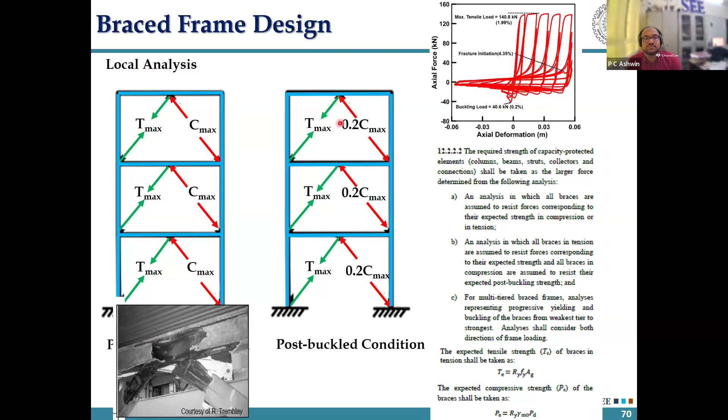So when you resolve it, if you have a calculator, you can check now itself that the vertical component in the post-buckle case is much higher than in the pre-buckled or global analysis case. So when such a failure was seen, it was understood that specifically in chevron configuration, there is a condition that high axial force may come after the buckling of the brace. So that has to be protected. That is why this local analysis has come about.

Now, as I said, there are certain configurations that are allowed. These are the allowed configurations that can be used in SCBF. Whereas these configurations, because there is extra additional force coming in the column, are not allowed.

There are also knee braces, where again undue forces will flow into the columns. It may damage the columns, so it is not permitted to be used in high seismic regions. And single braces - it's a strict no.

Anyway, you can have one more bay here with one more brace, then you can use it. There is no issue with respect to that. So single diagonal brace frames are not allowed.

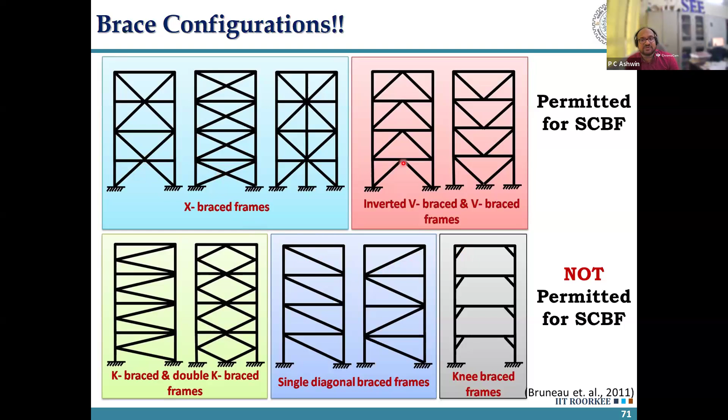This is split X, this is single story X, and this is the chevron configuration or inverted V. Inverted V is where that local analysis comes into shape in terms of the imbalance in vertical forces, and that results in the failure shown in the picture here.

Coming to the final EBF link - here is one more concept that comes into picture. The EBF link, as I said initially, is a short link which is the most energy dissipating element. In this, the brace is not allowed to buckle or yield.

It's a force controlled element. It should remain mostly elastic, and then moment can also be transferred. Without the gusset plate, you can directly connect it to the edge of the link element. But the energy dissipation is done by the small link element.

So my question to you guys is, if the link element is very small, what will dominate, if you think about it? And if the link element is larger, how will it yield in non-linearity? I'll complete in 10 minutes, Praveen.

No problem, please continue. Yeah.

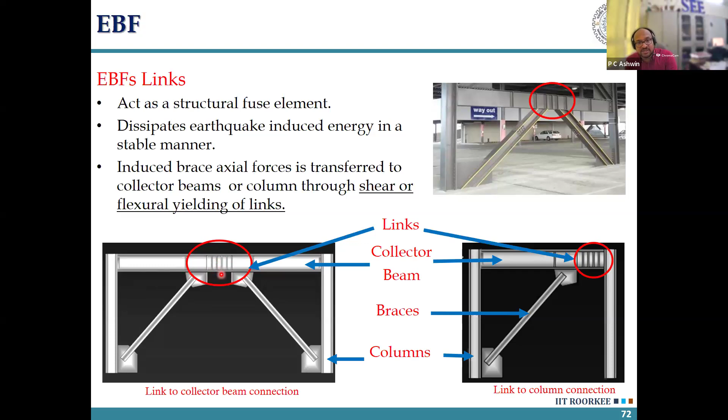So the link element length is the most important characteristic here. If you look at a link element, let's say I have an eccentrically braced frame - this is a link to column kind of eccentrically braced system, and this is a link to beam kind of eccentrically braced system.

And this is what the code actually suggests to use. IS 18168 rightly tells engineers to choose this kind of system, not the link to column, because the link is our hero - it undergoes non-linearity, and transferring that to the column, deformations and too many things happen there can damage the column. So it's better to have all these things happen in the beam itself.

So when I have the link much closer, if my E by L is very small, meaning this gap is very small, my stiffness is much higher. If E is 0, it is a CBF system. And if E is equal to L, then it is a moment resisting frame system.

So as the link length increases, my stiffness decreases and reaches to the MRF level. And if my link length is small, I have higher stiffness in the system. There can be many variations in the link element.

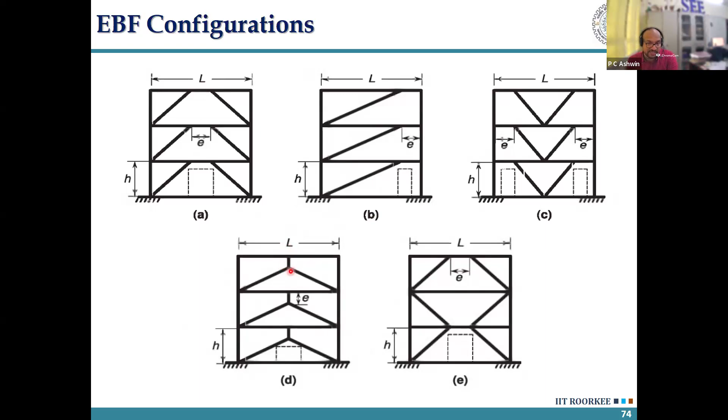You can have this eccentricity, this kind of configuration. This is the link element here. This is getting popular right now in terms of vertical link elements, as people are devising link elements which can be removed after an earthquake, since a link in the beam gets damaged and is very difficult to remove. But if it is something external, you can actually remove it and replace it.

So during an earthquake, the link is the element that undergoes non-linearity. There is no buckling or anything in the brace right now; it is just the yielding of this particular member. Now, if such a deformation happens, the slab is bound to have some cracks or something develop.

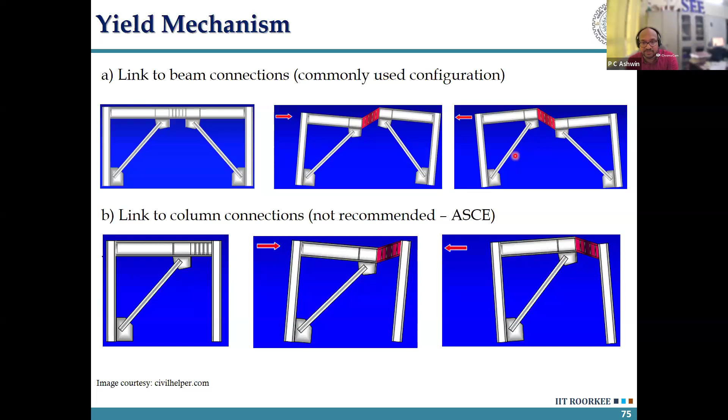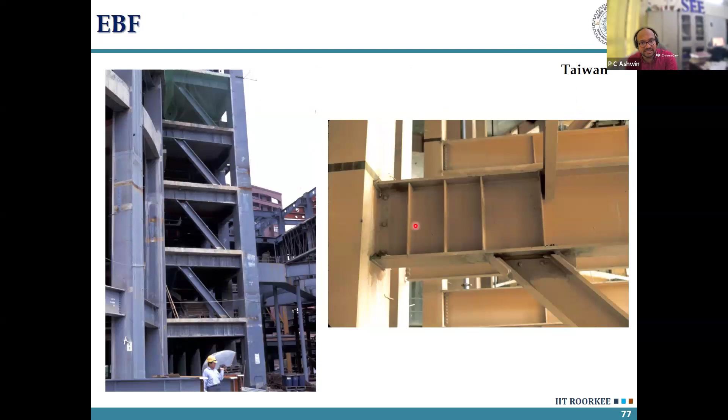There are certain clauses given for this, I'll come to it later, maybe in a different session. But this is how it looks like - this is an EBF system in this particular building, an older building with a link-to-column connection. Strictly, this is not allowed as per the current Indian code IS 1893-part... 18168. This is fine as per 18168.

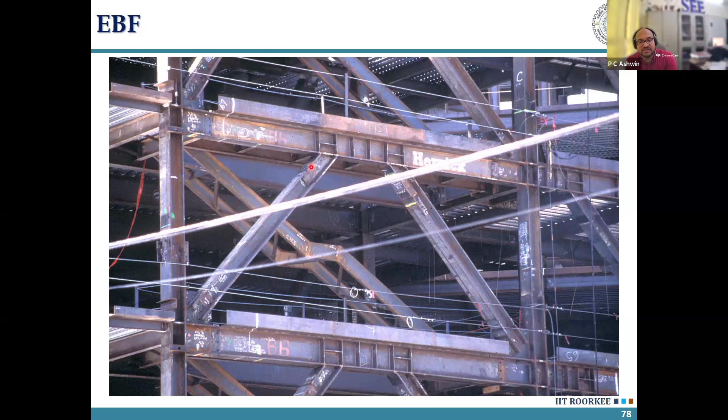So you can see, you may say, sir, the link element though - you have stiffeners, and isn't it a protected zone? Like in a CBF system, the braces are the green element, those are the protected zone, nobody should pierce or do anything like that. Similarly, in an EBF system, this is a protected element. Why are stiffeners given then? Aren't they kind of intruding upon that protected zone?

We'll come to it soon. So a link element, how will it perform? If it is of a very short length, you know the shear force will be very high, and you are bound to get shear yielding in the element - shear yielding in an ideal short link, pure shear case as we normally think. And if the deformation continues for a long time, then shear buckling due to shear forces occurs, as you see in a plate girder - tension field effect and the compression gets buckled. The same phenomenon happens in a short shear link.

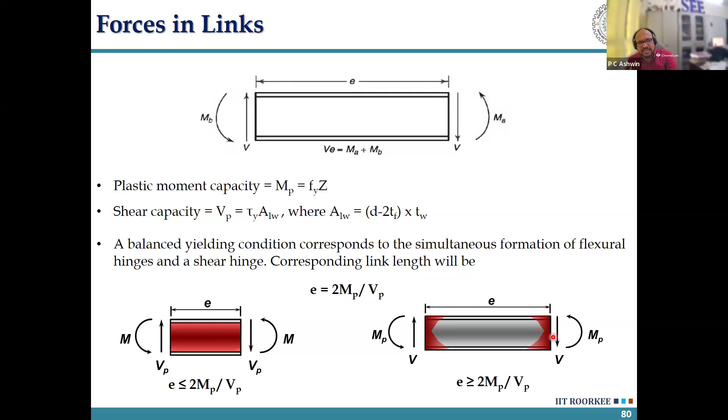Whereas in a long shear link, if flexure dominates, then flexural hinges form as in the case of a beam in a moment resisting frame, only at the ends. So you understand that in RCC, shear is a very feared thing since its behavior is very brittle. On the contrary, in an EBF system, the shorter the link element is, and the more shear-dominated the behavior, the better its performance - higher energy is dissipated based on a short shear link rather than a long shear link.

So the code has come up with an equation: if the link length is less than 1.6 times plastic moment capacity by plastic shear capacity, it will behave in a pure shear kind of way. And if its link length is more than 2.6 times Mp by Vp, then it will be pure flexure behavior. So designers have this guidance - whatever cross section they are using, if they follow this criteria, they will either land up with pure shear or pure flexure. If they fall in between, it will be an intermediate behavior. This is the codal clause.

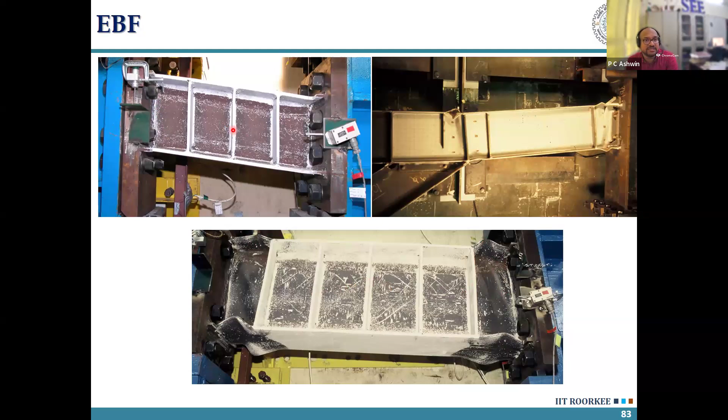But among the three, this is the most stable, more energy dissipating element in terms of the link length. So, shorter the link length, the better the performance would be. Now in a link length, you can see the tension field effect and the buckling in compression.

This is a plate under the link, which is small in size under pure shear. There is buckling in the compression phase and tension - this way is compression, this way is tension. So if you provide stiffeners, look at the difference in the hysteresis curve.

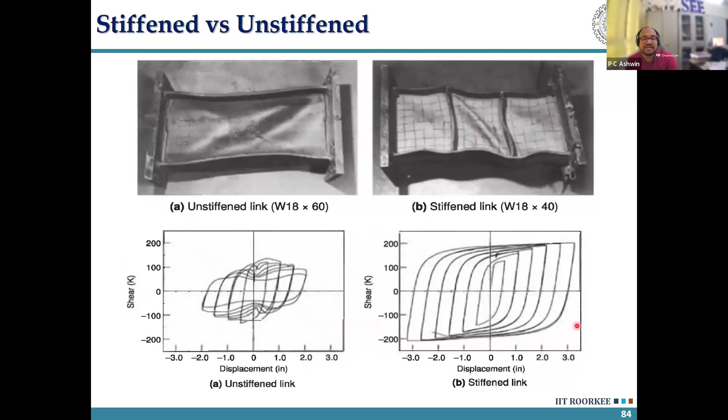So if I have a stiffener here, each of the individual panels will now act like a shear panel. Buckling will happen in those individual panels. The buckling capacity, in comparison to the left, here it will be more because its effective length has reduced. That causes higher energy dissipation in the stiffened link element. That's why you see stiffeners in a link element, right?

So as the link length reduces, energy dissipation capacity increases. That is the whole deal. Now, if I ask you about the design, how do you do the design?

Think the same way as you did the design for CBF. You have an EBF system for whatever forces that are there, for the combination of forces, you design the link element first, and whatever is the peak capacity of the link, based on that you design your beam, column and braces based on that combo global analysis. There is no local analysis or post buckling analysis in case of an EBF.

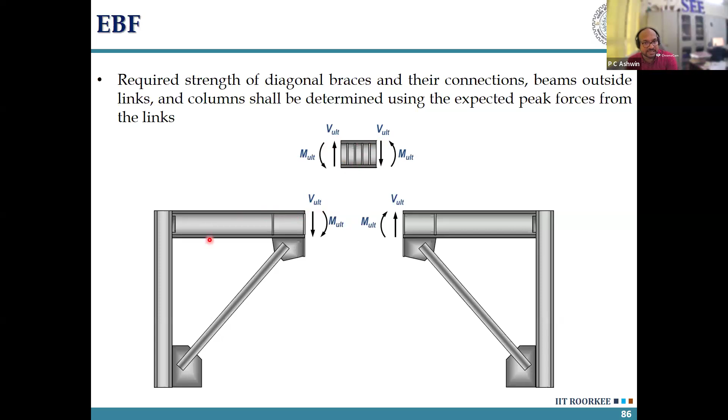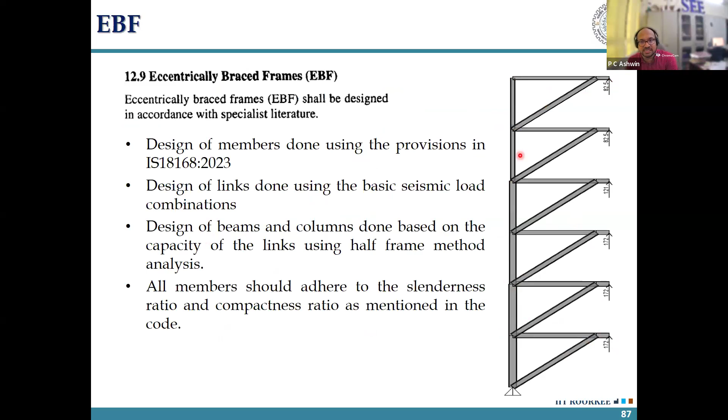It's straightforward. And then once you have found out the forces, you can use a column tree like this. There are some rollers missing at these levels which will give it stability, otherwise with these forces it's going to fall down. So if you do the proper analysis, then you'll find out the forces in the force controlled elements, and accordingly you will be able to design these members.

So this is the whole combo of concepts using IS 18168.